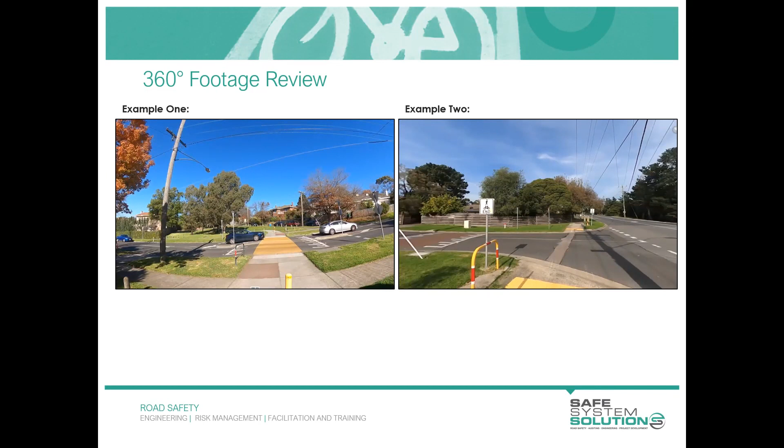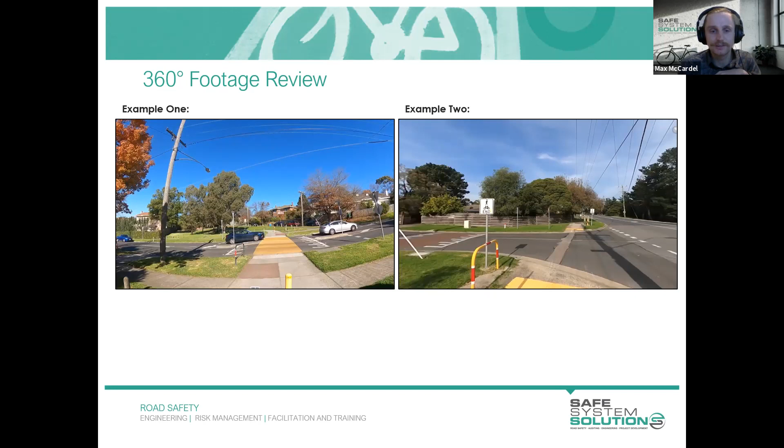Okay, so that's just a quick review of the 360 footage. I also just made a note in the previous module regarding this little slow point treatment that I mentioned is in Perth, and I said I'd follow that up with a photo of what that looks like in busier times. Apologies for the resolution of the photo - I thought I had a better snap of this, but you can see the pedestrians there crossing in that particular zone to access the train station.

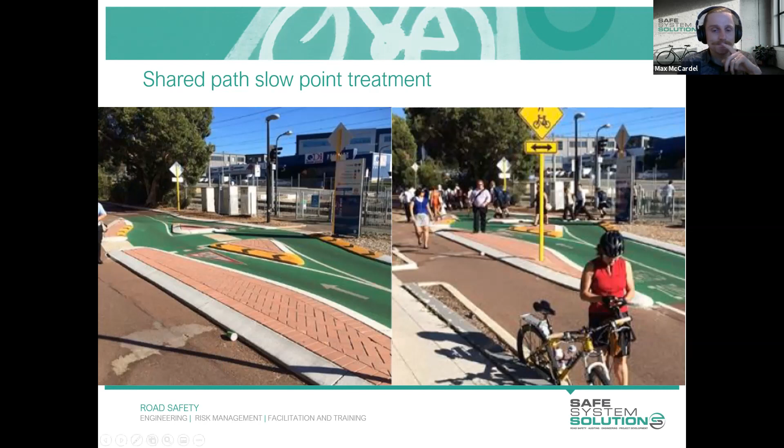It's City West train station for those that are familiar with Perth. And because there's such a congregation of people there, they decided to put this treatment in to slow cyclists down. However, the suggestion from Tuesday to raise that pedestrian crossing point instead, I'm still all for that. I think that would have been a much better solution, but this is just an example of what could be implemented.

Max, the questions come in around road rules. Don't the road rules require cars to give way, like in example 2?

Yes, so my understanding is that a vehicle turning into the minor leg has to give way to all pedestrians or cyclists crossing that facility, so those turning into the minor leg. However, if you're leaving the minor leg and going into the major road, you're given the priority.

And that's my understanding, Ken, is that true? I probably should have checked in with you first. Yeah, that's my understanding as well. So it's a bit of confusion in the road rules, where on one side of the carriageway you get priority, but on the other side the vehicles traveling get the priority. There's not a clear indication of what the road rules there are really stating, and I think generally both motor vehicles and the general population wouldn't even understand that road rule either. So to me, it really communicates that in that example, you as the cyclist are forced to slow down and give way to both streams of traffic, entering and exiting general traffic.

Good question though. Today's session agenda is all about on-road cycling facilities, as I mentioned at the start. So things we'll be looking at are protected bicycle lanes, which is considered best practice in this space. We'll look at one-way paths as well as two-way paths, sometimes referred to as bidirectional bike lanes, and we'll look at a range of different separators that can be used to facilitate these protected bicycle lanes, because it's often thought that all you can do is provide those Copenhagen lanes with physical concrete median strips, which are an expensive alternative, but there are other options out there which we'll jump into later.

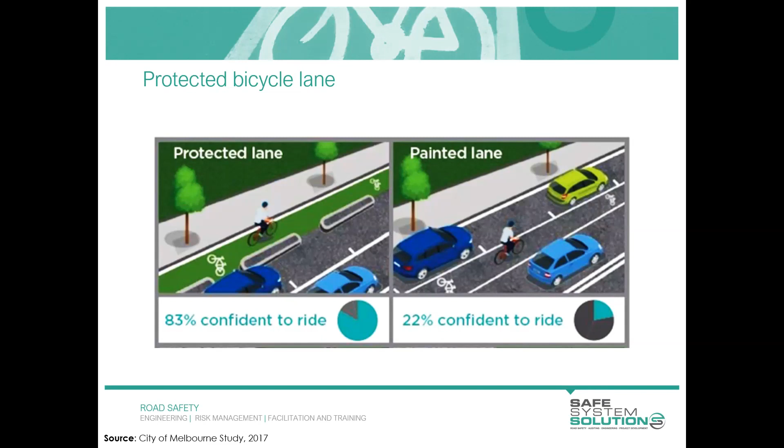Hempcrete - I'm all about the sustainable options, so we will actually touch on that a little bit later in this presentation. I'm very glad that you brought that up, because it will become relevant soon. Any other questions, Emma? Not at this stage, no. Excellent, feel free to keep jotting down any notes. Otherwise I'll keep running through.

So, one-way paths - I've provided this typical cross-section of how this may look. As the name suggests, the cycling traffic travels in one direction on both sides of the carriageway, so you're basically building the infrastructure on both sides of the street or road. You'll see there's a 1 metre safety strip, or median buffer zone, and it's physically raised - not just a painted treatment. There's physical infrastructure to delineate that space.

So what that means is it's not only a visual cue for motorists - this is the cyclist space, this is where I'm supposed to be - but should an errant vehicle fail to see that, or perhaps there's a medical episode and it crosses over that physical obstruction, the curbing there would actually slow a vehicle down. So if there were a collision, it would be at lower speeds. There's also that benefit of physical separation - bringing vehicle speeds down should there be an event where they're crossing over onto the cycle path.

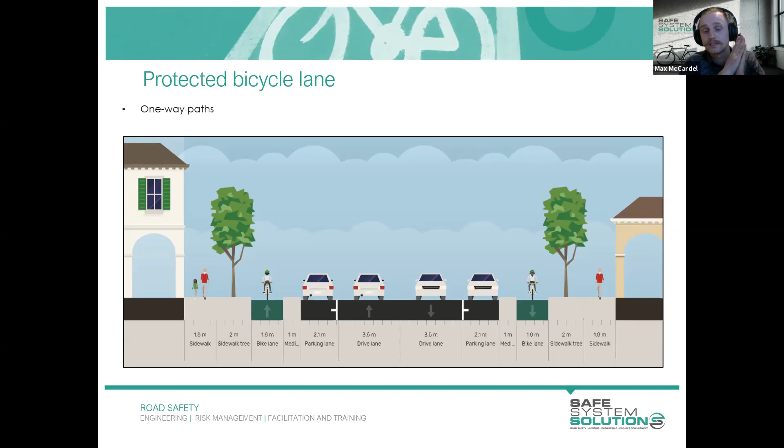So this is how a one-way path typically would look. Sometimes there's parking lanes, other times there's not - it's just adjacent to the traffic through lanes. And here's a photograph of how this may look in the real world. You'll notice in this example these are typically called Copenhagen bike lanes, and they're provided with this fairly wide safety strip.

Any idea why we would need these kind of wide safety strips where there is parking? Let me get my pen out - I know last time there was a little lag between the pen drawing and me speaking, so I'll try to delay it a little. But any idea why there'd be a width of approximately 1.5 metres adjacent to the parking bays for these?

I'm getting a few responses here, Max - people saying doors, prevent dooring, people getting out of cars, car doors. Yeah, car dooring, spot on.

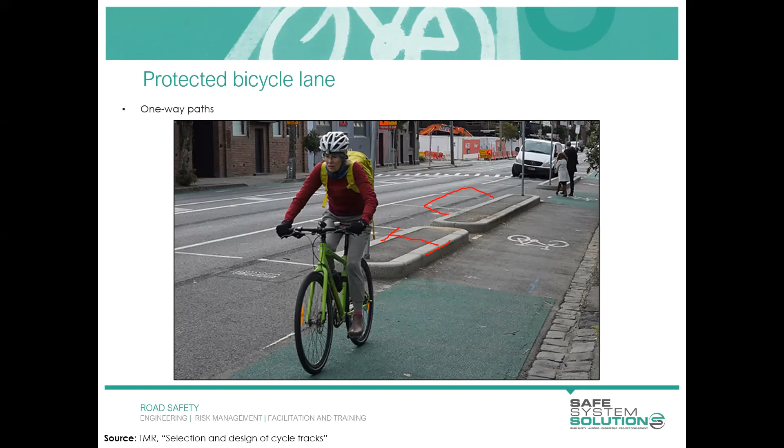So even if passengers open up the car door and fling it to their maximum extent, their ability to hit a cyclist in the cycling lane is greatly reduced because you've got this extra space. It's also really useful for mums and dads getting prams or toddlers out of cars - you've got this separated, elevated space that can facilitate all of that movement without having to enter the bicycle lane. So it's got a two-way kind of benefit.

The other side of the coin is it does provide an additional tripping hazard for people who are crossing the road along the journey. And there's also something else to consider, that being drainage.

If you provided these separation strips in a continuous fashion, then all the water would kind of pool at these curbs, which would then have to be, either you'd have to install some new drainage lines to take that into account, or the more common way to kind of account for these things is just providing little gaps, as you can see in this picture here, and that just lets the water funnel through and go into the existing drainage lines.

So that's what a one-way path would typically look like.

For bidirectional paths, you'll see here the difference being that all the cycling traffic is located on one side of the carriageway. This would be most appropriate where you have all of the exciting things, or the things that would make you as a cyclist stop and get off your bike, located on one side of the road. So if your train station is on that side of the road, and your library, all the cafes, and on this side of the road perhaps is an esplanade or a beachfront or something like that. Perhaps this is designated, the left-hand side of the screen, as the priority side to cater for.

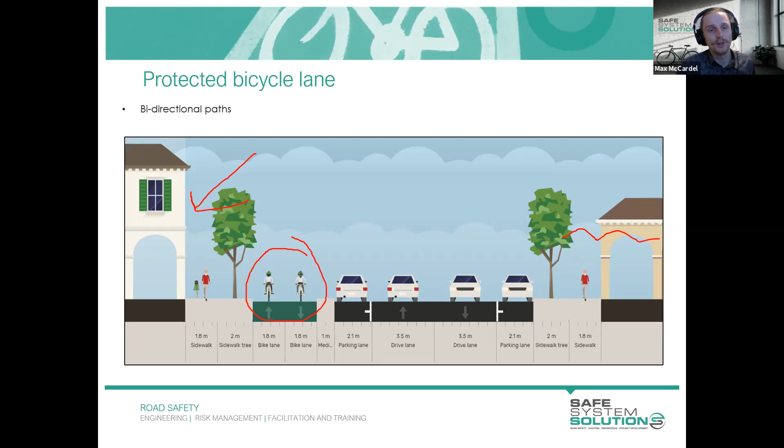This is really where a bidirectional lane would be most relevant. So they're not quite as common as the one-way path shown before. However, they do have their uses, and there's a few little drawbacks that I will talk about with providing these bidirectional paths. I'm not trying to discount them, because they do provide still the level of separation from general traffic, which is fantastic, but there are a few little extra considerations you need to take into account if you were looking at implementing bidirectional paths.

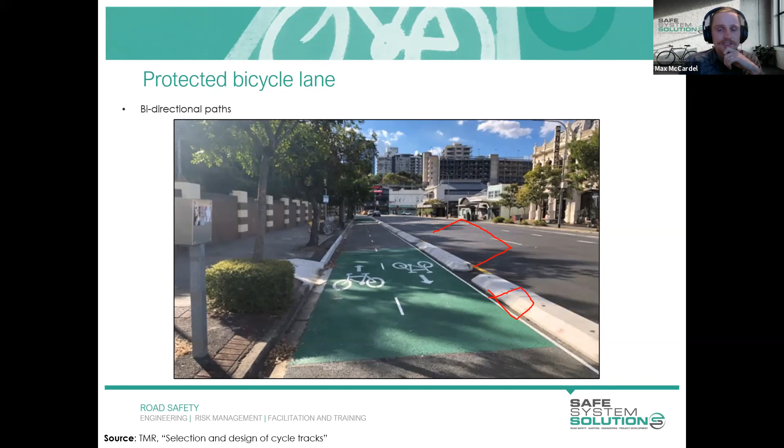So as I touched on earlier, I just wanted to run through a few of the considerations as part of both providing a single lane or one-way bicycle lane versus a bidirectional two-way bicycle lane.

So both examples provide physical separation between vehicle traffic and cyclists. Both of those get a tick. That's awesome—you're getting all your general traffic away from your cyclists, and they're physically protected by some type of separation strip. So that's fantastic.

The other characteristic is physical separation between cyclists traveling in opposing directions. So a cyclist going northbound and a cyclist traveling southbound in a single lane, one-way operation are on other sides of the carriageway, so they're not going to hit each other. In a bi-directional facility, you've got them right next to each other—in other words, a cyclist can hit another cyclist because there's a potential conflict there. That could be particularly relevant if there's any curves or narrow points along the alignment, and considering things like wind or just the ability to maintain stability as you're cycling uphill, you may have to start wobbling. That risk of actually colliding head-on with another cyclist, although it may be at low speeds, is still something to consider if you're providing a bi-directional facility.

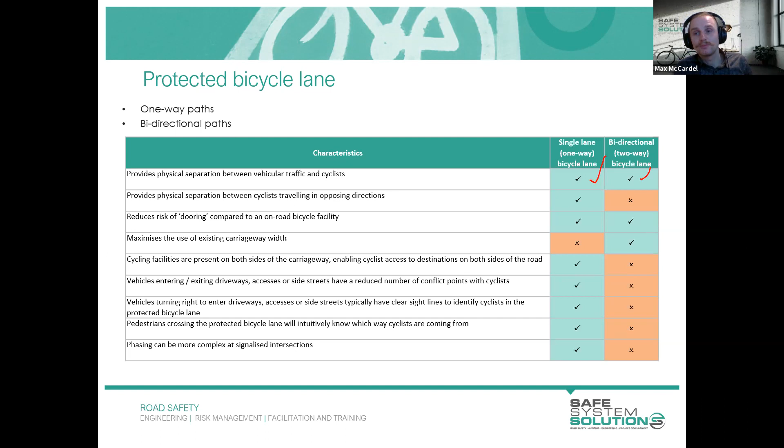Phasing can also be a little bit more complex at a signalised intersection where you've got a bi-directional facility. Not impossible, just a little bit more complex. You may have to add an additional phase or green time for crossing where it's all on one side.

Here's an example of what I was talking about, where a vehicle is crossing over the bi-directional facility. This has actually been flipped because it's from an American reference. I've included the source at the bottom, which is included in your resources if you wanted to look yourself. Intuitively, the driver is looking at oncoming traffic and cycling traffic coming from that direction as well. It's not as immediate in our response to look both ways when crossing over a bike path, and that would be incredibly relevant in bi-directional facilities.

So if you've got lots of these little crossover points, driveways, or accesses, you really need to be considering how you're going to communicate to drivers that there is cycling traffic in both directions operating in this space. Because intuitively, motorists are typically looking in just one direction.

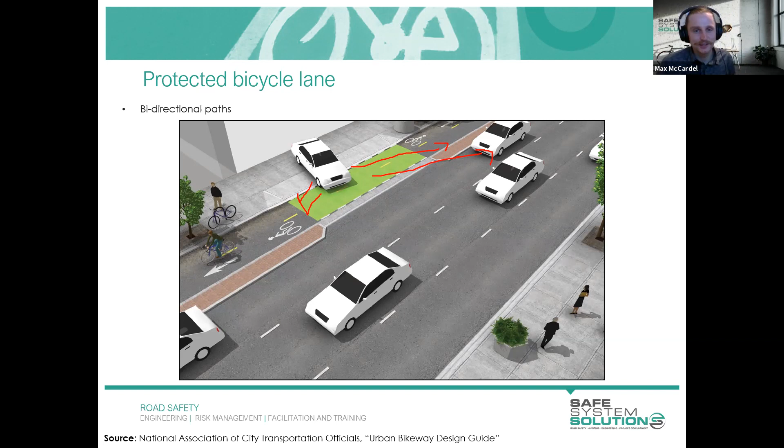In a similar fashion, this has also been adapted from Transport for London's London Cycling Design Standards, so feel free to have a look through that if you want to see the original—it's obviously been doctored for this presentation. If this vehicle here is turning right, you can see their ability to actually sight these oncoming cyclists in the bidirectional lane is fairly limited.

They would have to look right across their right-hand shoulder to spot cyclists traveling, who could very well be doing 20, 25, 30 kilometres an hour, similar to what the car is traveling at. So this vehicle may just be focusing on getting a break in the traffic and the cycling traffic, not really paying attention to any of the other cycling traffic heading in their same direction. So there's another risk there.

That collision can occur because we've just introduced this extra conflict point where the sight lines are not fantastic. I'll open it up to the group if anyone can think of one way we could potentially manage this conflict point in this actual example.

Sure, I've just got some other comments too coming in, Max. So bi-directional can be useful on the one-way CBD streets in Hobart and Launceston.

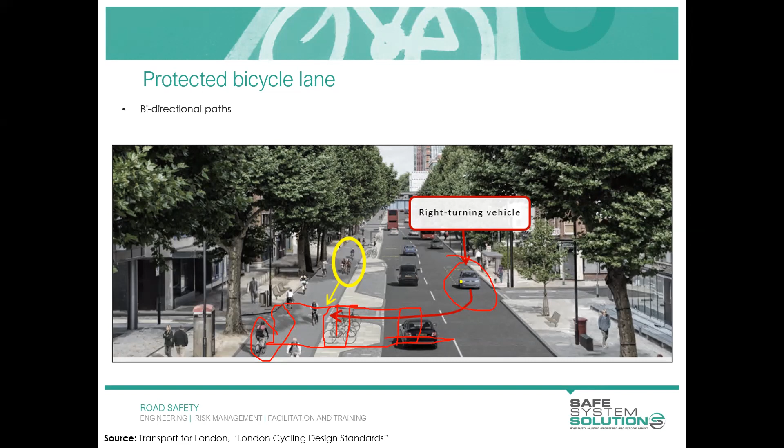Another example: provide enough width for the turning vehicle to have full refuge, so that the vehicle comes to a stop to fully give way. Well, that's just taken the words straight out of my mouth. Can we give that person a prize, Emma? Absolutely, Sarah, that's excellent. That's an ideal situation where you've got the carriageway width available, and if that's justifiable and you're able to do that, it's certainly a good way to manage that conflict.

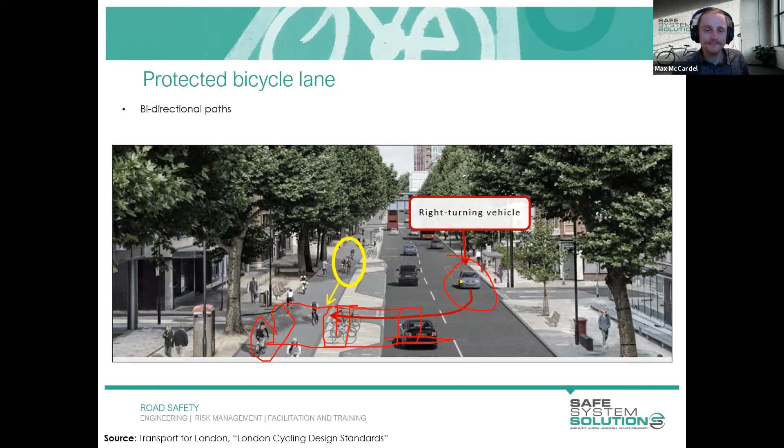I'm going to hop into now the separators, because as I mentioned, when we typically talk about protected bicycle lanes, this is typically what's in people's minds: either a precast solution of a concrete strip with some type of infill, be it asphalt or things like that. However, it's not the only product on the market, and there are other things out there that you can use to provide a physical separation between the cycle lane and general traffic.

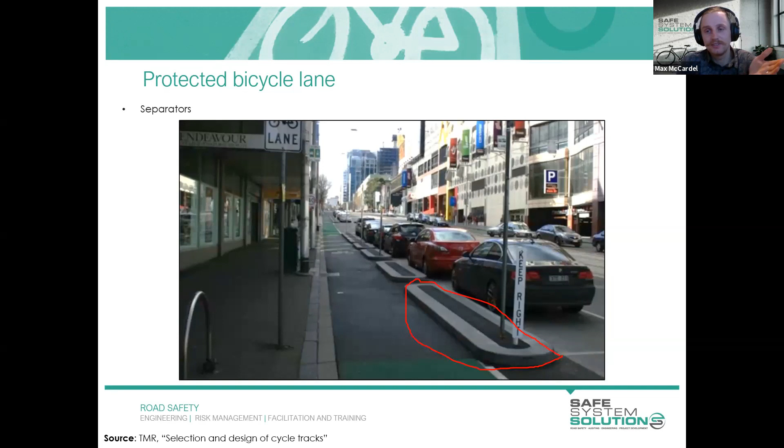We'll hop through a couple of different examples, but while I'm discussing these precast solutions, or even if constructed in situ, a few things to think about are how you actually manage the barrier curb profile. It's generally not preferred to do a vertical barrier curb on the bicycle lane side, because you want it to be a little forgiving if a cyclist happens to shake a little and go over towards the curb. If a cyclist were to strike a barrier curb like that with a straight vertical face, that's a hazard in itself, and would likely result in the cyclist coming off their bike.

On the other side of the spectrum, if you provide the barrier curb for the parking lane, I think that's a good alternative, and we'll come to that reason in a second. In this second image, you can see we've got the semi-mountable option on the bicycle lane, which does get a tick because it's a little more forgiving. If a cyclist were to ride onto that curb, they'll likely be able to correct their movement before falling off their bicycle.

On the other side of things, if you were to provide that on the parking lane side, what can actually happen is the parked vehicle can prop up onto this infill section, or go further across and just park straight onto the bicycle lane. You may think that's a joke, that people wouldn't dare do that, but we recently completed a road safety audit, and we have photos of people doing exactly that.

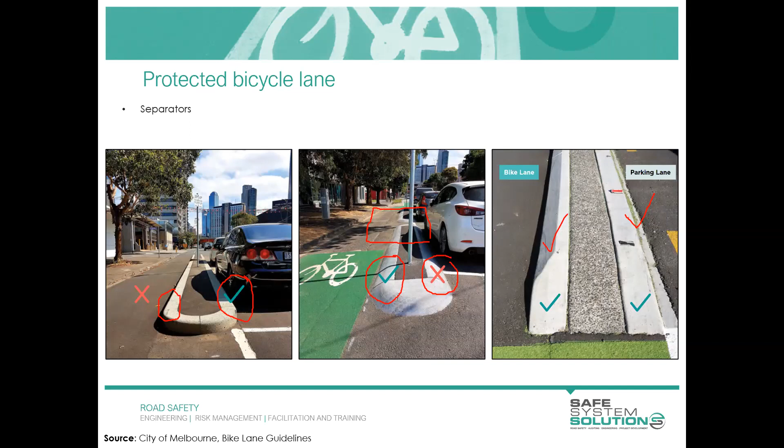So yeah, and no surprise that motorists would park on a mountable curb area. Footpaths are also parking spots here in Hobart. Are there risks? That's exactly right. So yes, that's why it's best to not provide that provision, and hopefully reduce that risk altogether.

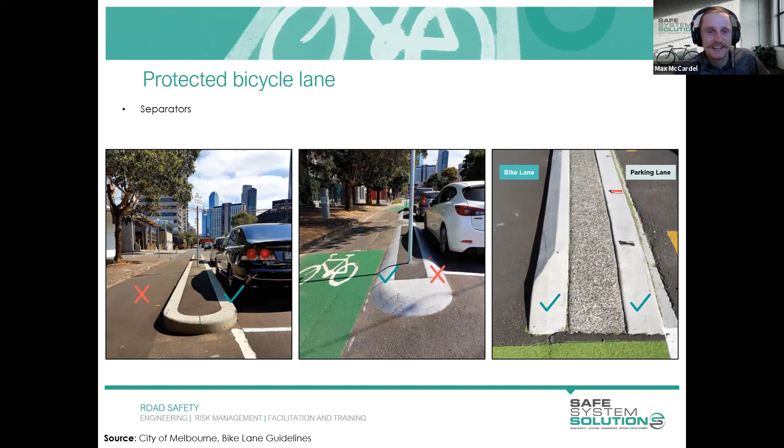Another thing to consider if you're providing those wider safety strips is whether you've got any disability parking bays, ensuring that all DDA requirements are met. It's disappointing to see, but if you're not including things like curb ramps or a way for people using these disability bays to actually access the adjacent footpath, and also providing some kind of communication that this is the crossing point where we want people to access the footpath from the disabled parking bays.

All of this is incredibly relevant if you are doing detailed design, just making sure that you're not building these protected safety strips all the way through, as shown in my red drawing there. Otherwise, you've just blocked off people from accessing the footpath, which is not a good outcome.

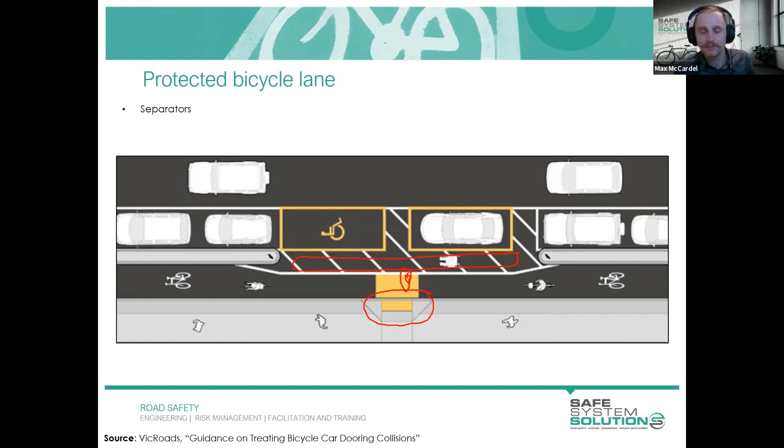Another really good option here would have just been to raise up this pedestrian crossing point, because that also signals to cyclists that this is a pedestrian crossing point - I need to slow down, I need to give way to pedestrians crossing here. What you've got there is just a poor outcome for pedestrians. So something else to consider where you're providing protected bicycle lanes: if you are doing any crossing points, make sure there is access for pedestrians.

Okay, so I'll hop into some other types of separators. Here's one that was looked at before, and this is most appropriate where we are looking at providing bicycle lanes next to through traffic lanes, not next to a parking lane. So if you don't have to worry about a door opening, you can minimize the width of the product you're using. This is a bolt down precast concrete island, used in segments.

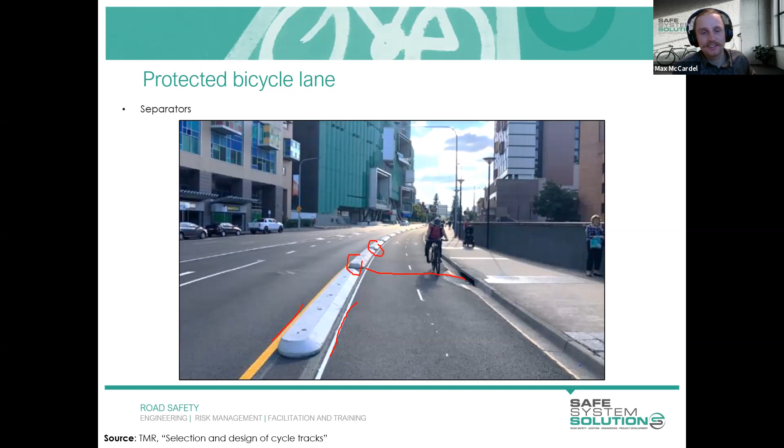Once again, you can see the gaps that have been implemented to facilitate drainage, so the water can run out into the pit and you don't have to design a completely new drainage line as part of doing these bolt down works. A few things to remember: providing those gaps to ensure adequate drainage, and also making sure all the sight lines are there so cyclists can see exactly where the physical separation strip is in place. You'll also note that has got the semi-mountable curb there as well.

Any questions so far, Emma? I've just got a few comments actually. Well, what if you are a driver with a disability, as in the previous slide? There's tram stops in there as well. Perhaps - oh, this slide, was it? Yeah, I think, or then maybe the one before. Yes, probably, perhaps, yeah, that one.

So this is predominantly for the bus stop - that's the bus stop kind of there. I don't think there's any parking along this section, it seems to be all off-road over here. I can follow that one up after this session though, just to confirm the extent of that question. Yeah, no problem.

Coloured would be more effective. Yeah, coloured crossing seems to be becoming more and more prevalent, whether that's a red with white zebras, or I've seen pink out there as well, and yellow. But yes, coloured pavement seems to be more and more used.

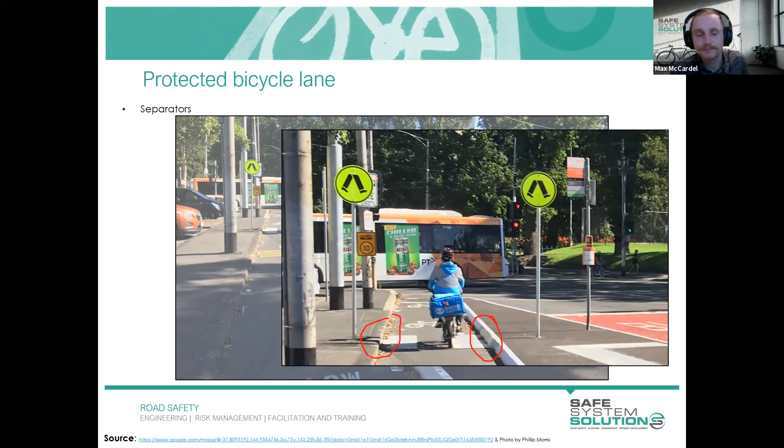A raised crossing there would in turn require added infrastructure - stormwater infrastructure maybe? Okay, yeah, stormwater, sorry. Stormwater infrastructure, yep, that's true. So if you are raising a particular crossing point, you do need to look at whether you need to provide additional pits and pipes to make sure that you're not introducing any extra ponding areas - something else that needs to be considered during the detailed design of these things.

There's another comment that stormwater grates would have to be bike safe. Yes, that's right. So you want to make sure that the tyres for cyclists are not able to fit in your stormwater grate. Otherwise, you've just introduced a new hazard as well.

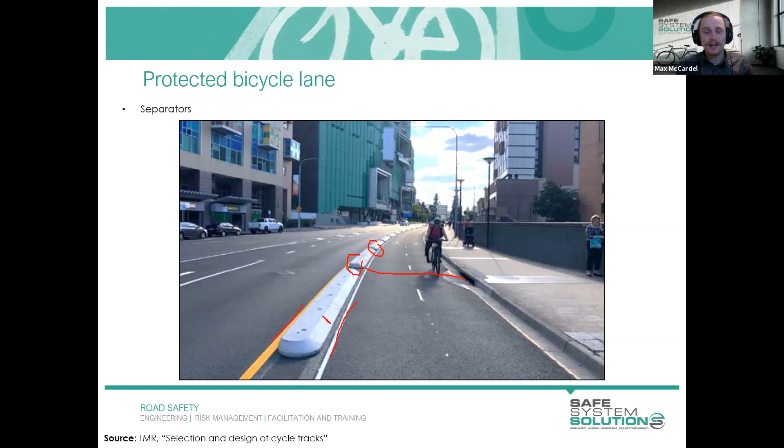Because it does provide the physical separation, so that one gets a tick, and it clearly delineates where the cycle space is versus where your traffic stream should go, so that also gets a tick. But it's something that doesn't gel quite too well with me. Someone's commented that the height of the corners may be a danger, it's hazardous, these planter boxes, perhaps it isn't mounted enough.

Pedal strike as well, no space for people exiting cars. Basic things like weeding and watering, practical things. That was actually where I was coming from, the practical nature of these things, and also the fact that plants can become overgrown very quickly, and then you've got leaf litter and things like that spreading into the bicycle lane. Although it may look attractive on day one, does it still look like that 12 months down the track? Has it been vandalized, or has it just become really bushy, not quite as appealing, and almost a hazard in itself if you've got lots of vegetation spreading into your bicycle path?

So something to consider. And also, if you do require pruning or anything like that, does that mean the bicycle lane gets shut off and cyclists have to now travel in the traffic lane? Because I don't think they'd be closing the traffic lane to do that kind of maintenance work, they'd be closing the bicycle lane as the first point of contact. So I'm not against this kind of treatment, and I think it's a nice way to improve the streetscape amenity, but I think you just got to be mindful of which products you use.

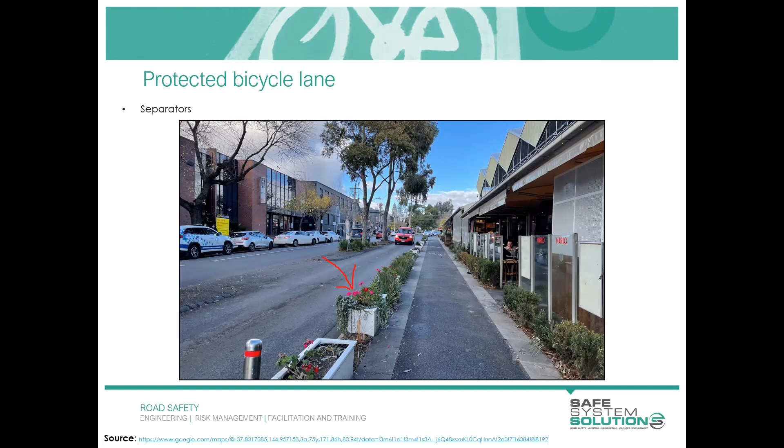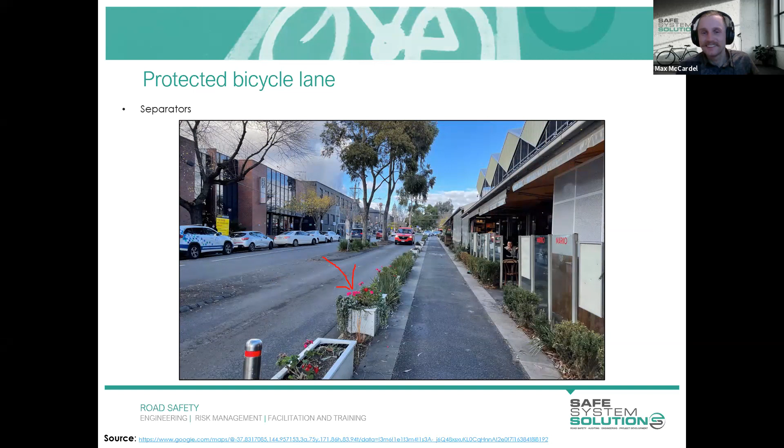A few people are saying it would be a bit chunky, or tricky if you fell into it, with sharp edges and things like that, and it's hazardous is the general consensus. Someone said this would be considered a low-level fence, a pedal hazard that you mentioned yesterday. I completely agree, that's right. And you could certainly pick that up as a hazard if you're doing a road safety audit, or as you're going through the design, you could note that as a hazard. There's no continuous rail either in that principle. No, that's exactly right. Yes, perhaps some warnings or something like that, someone else has said. This sounds hazardous, we're all on the same page there.

These little guys do have a specific product name, so they are a proprietary product. I'm not trying to sell them or anything like that, but they are recycled plastic, which is a big tick in my book. And yes, they're just bolted down.

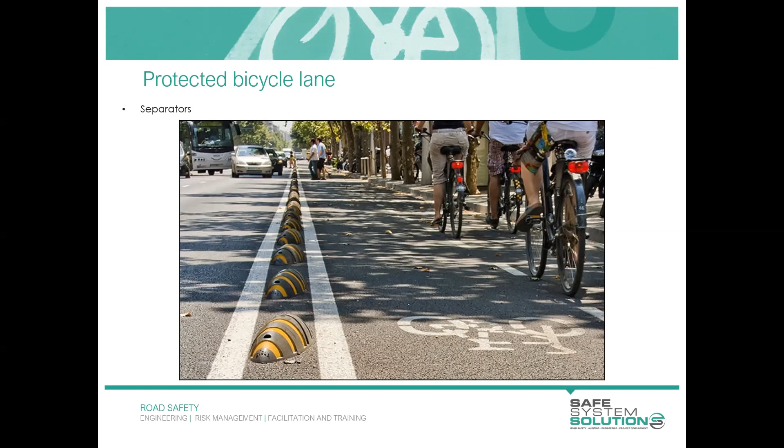I'm going to open this up to the floor as well. If anyone has any idea what this product would be called, don't just start guessing anything you want, the title does relate to exactly what it looks like, so that's the only clue I'll give, but I'm welcoming any hilarious answers. That is cute, we've got a pangolin, bumblebee. Oh, pangolin, that's a good one. A bumblebee, nice. Armadillo. Road slugs. These are great. Bees. No wonder the bees are dying. Lots of bees, lots of bumblebee, rumblebugs. Yeah, ladybugs. Ladybug. Well, maybe we'll get in touch with the company that produces these, because we've got some new alternative names for them, Emma. This is good stuff.

The name of them is, in fact, the armadillo. So whoever gets the armadillo, please give them a prize, Emma. I think I'll give a prize to the pangolin as well, because I'm pretty sure that's a very similar animal. They look fairly similar, so I just also like that word.

The armadillos are used pretty extensively in the US and also Spain. Obviously, you don't have that significant physical impedance anymore, as opposed to what was first shown with the protected bicycle lanes. However, it does still delineate the space between the bicycle path and the general traffic lanes, so it still does use that.

There is a trial that has been installed in Fremantle in Western Australia. It's a couple of years old now, but we do have precedents to install these in Australia. I've actually never cycled adjacent these things, but I think they're pretty cute, and I like the idea that they're recycled, and I think that's a genuine option. Once again, this would be appropriate where it's not next to the parking lane, so there's no swinging open doors, but if you're next to the traffic lane, this is a potential solution there for you.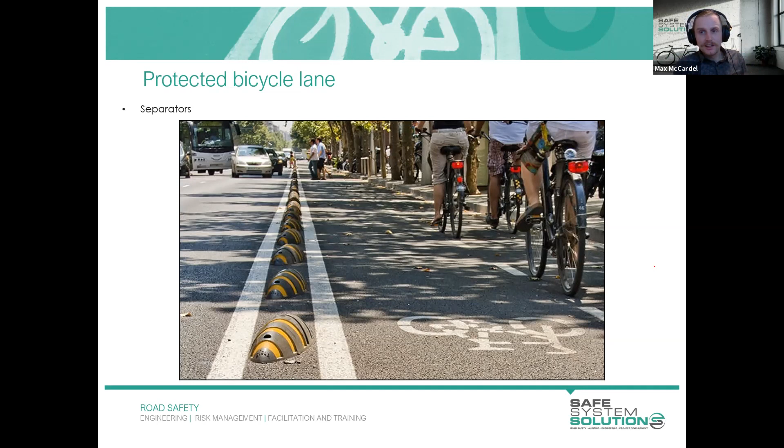And recently we worked on a job, which I might share at the end of this session, for the City of Greater Geelong, where they are proposing some bi-directional and single-way lanes. They have proposed 3 different types of protected lane treatments, one being the precast section, one being bollards, which I'll hop into next, and the third being this armadillo type as well.

So I can share, they've gone out to tender with the drawings for the plans. For those that are interested in how all these things actually look on plans, on actual designs, I can share that as a link, and you can download that design and have a look exactly how these things look on paper. It's a useful resource just in case you are designing something in the future and you're not exactly sure the best way to demonstrate how this facility would look. It gives you some type of precedence. So while it's available and openly on the tender website, if you've got the inclination, feel free to download it.

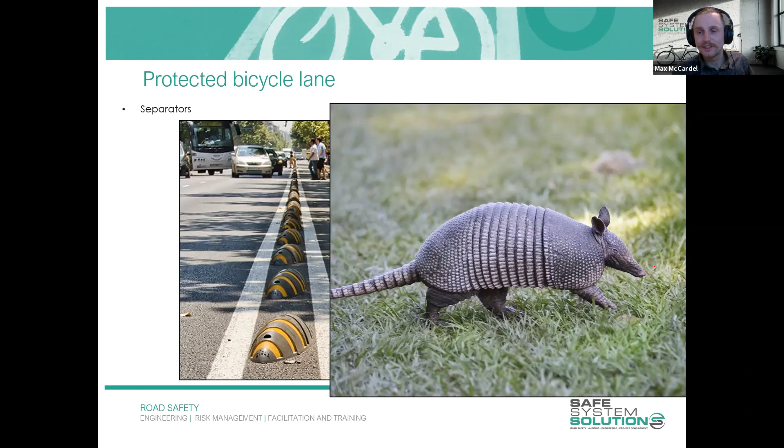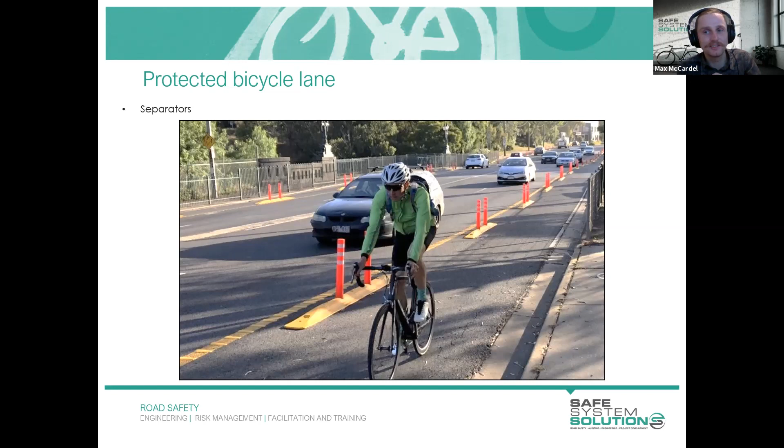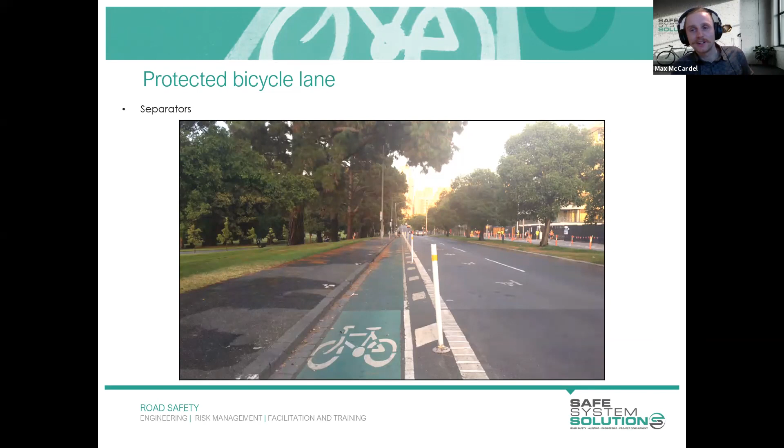Okay, so on-road bicycle lanes. So that's it for protected bicycle lanes.

We've got some other questions just come in before we start this. It's about all the other infrastructure, the armadillos and things like that look like a tripping hazard for pedestrians. Do you think we could use safety bars here? It might work well if well maintained, but as we all know, things bolted to the road are only as good as how well they are maintained. If not, they become loose and become a hazard.

Also, someone said, do people try to park in bike lanes? Yes, yeah, they do.

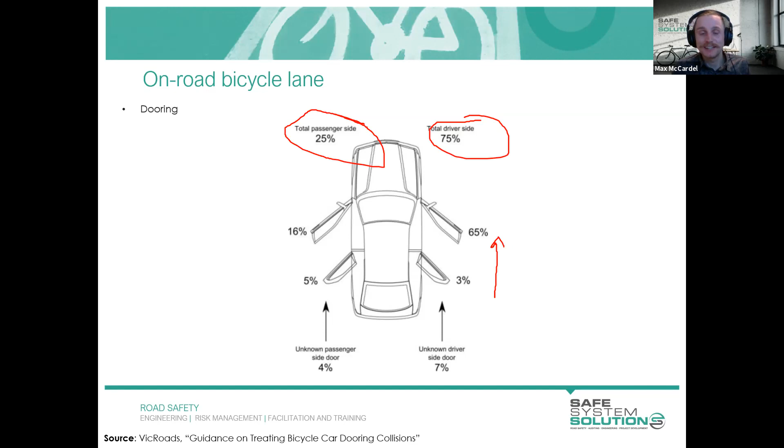The Vic Roads document, or the Department of Transport as they're called now, has their own technical paper called Guidance on Treating Bicycle Car Dooring Collisions, which I've just written down there in the source. It's got this fairly useful little matrix to suggest what may be required in different situations.

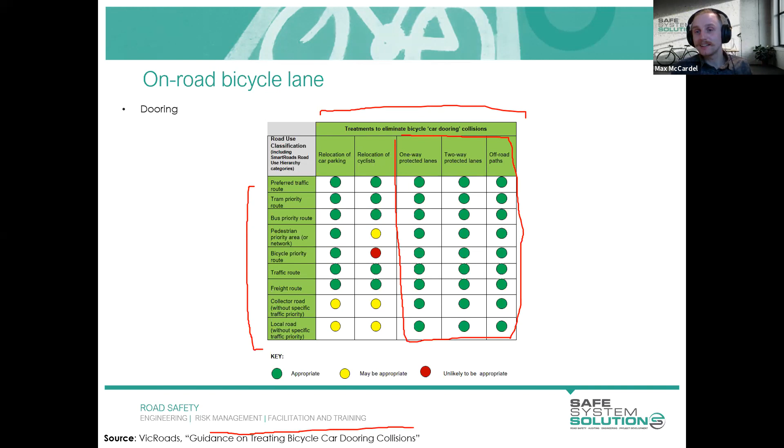Down this side you've got different road uses, if it's a collector road or a local street or something like that, and along here is the typical treatments that may be appropriate, where green is saying it's appropriate. According to this table, one-way protected lanes, two-way protected lanes, and off-road paths are always appropriate, which is really cool, really good to see. They're kind of encouraging more and more of this infrastructure to be out there - they're never saying don't consider that as an option.

The only time where it's unlikely to be appropriate is if you've identified a bicycle priority route, relocating the cyclists should not be one of the options, which is pretty intuitive. If this is exactly where we want cyclists to be, then banning them from that particular route is not an option.

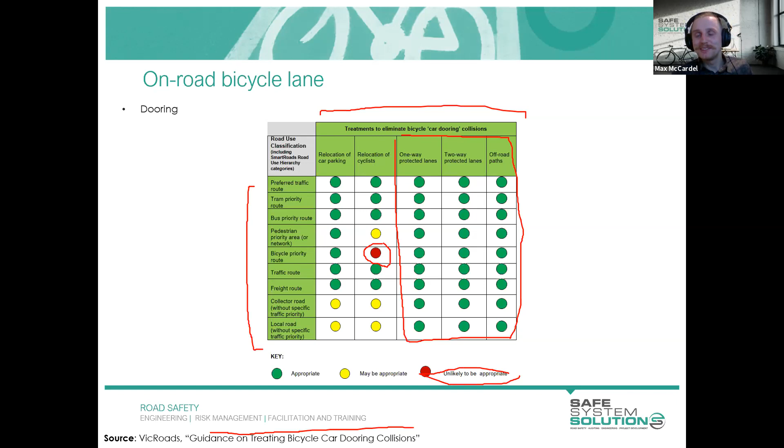So it's just a useful little table if you're considering what can be done in this space. I've got quite a few more slides to get through, so I might have to jump through these with a little bit more rigor.

As a general overview of the evaluation, riders took time to adapt, but there was a lower proportion of cyclists riding within 800 mil of the parked car, within that dooring zone. They do appear to be getting shifted closer to it. It was actually a reduction from 13 to 20% prior to installation, to less than 5% after. So there is a reduction seen.

It's certainly not the answer to these situations. It's just an example I thought I'd share where they tried this as a trial, and they seem pretty happy with how things are working, but I certainly wouldn't consider this a best practice treatment in this space, because even if you were cycling in that little green strip, it seems to still be within that dooring zone. So you haven't eliminated the problem, you've just put a little bit of paint down.

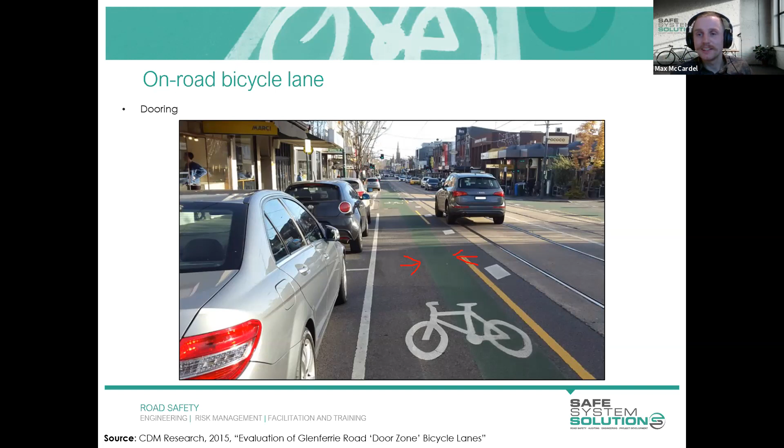Other things you could look at in this space is using double chevron. This kind of pavement marking is referred to as chevron, and using it as double protects you a little bit from the traffic lane as well as the parked lane, providing that buffer zone on both sides.

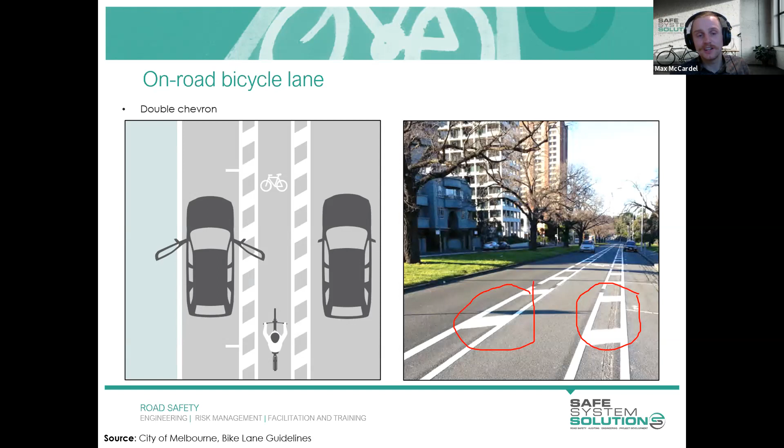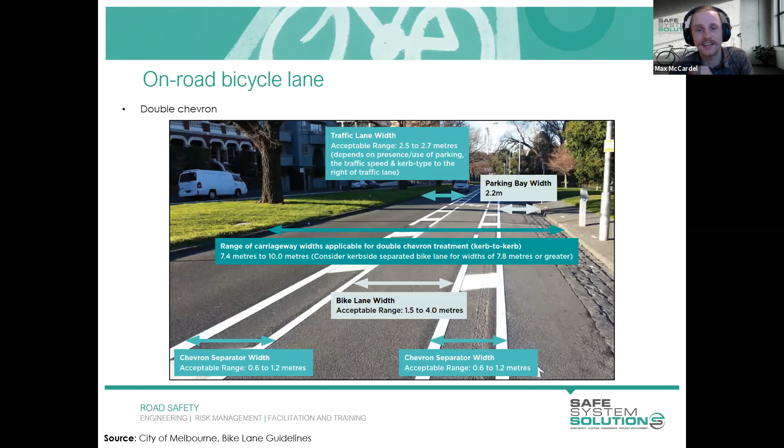How this may actually look, the typical separation width is between 600 mil and 1.2 meters. As I mentioned before, that 1.2 meters is taken as the extent of an opening door, so if you can achieve that, you're generally providing a safer cycling route. This is a good way to communicate to both general traffic and cyclists that this is their space to ride between, with a bit of buffer on either side, giving greater safety compared to what was previously shown.

A more common way, due to restricted widths in existing carriageways, is putting the chevron either on the parking lane side or on the traffic lane side. The reason you'd put it on the parking lane side is if you have a high turnover of traffic, in other words if doors are regularly opening and closing, such as a strip shopping centre or somewhere with 2-hour park limits. There the risk is more focused on the opening of the door, because that's probably occurring more often than in other environments, and so that's where the buffer has been installed.

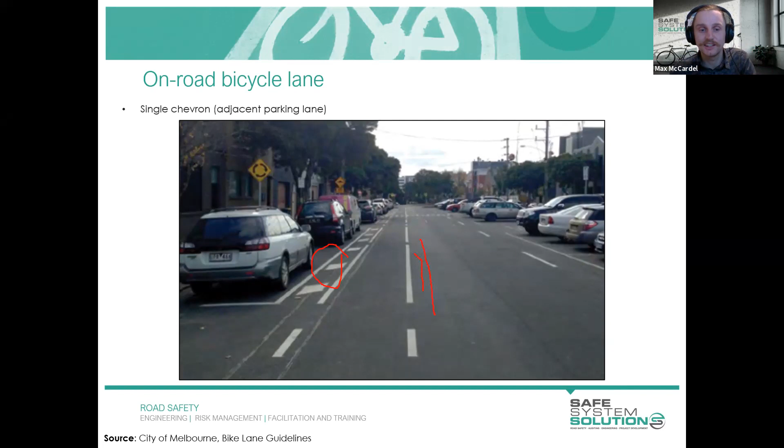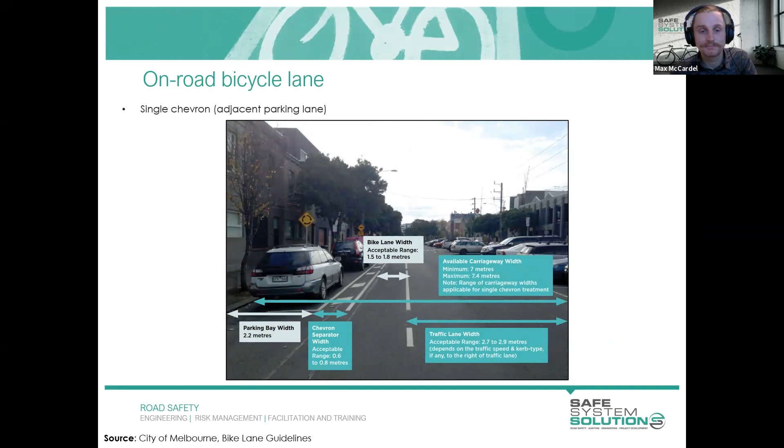In an ideal world, you'd have the buffer on both sides or a protected facility, but given that we don't always operate in an ideal world, you could look at applying the single chevron adjacent to the parking lane. There are some figures there as well, similar to what was shown on the previous slide, using the 600 mil chevron separator. And here's the other option where you've actually got the chevron on the through traffic lane.

This would be more appropriate where you've got long-term parking, perhaps in a residential street where the predominant parking is people accessing their houses. They're there all day, and door openings would not be as frequent as in the other example. So there's not an exact science to say this many door openings requires this, and that many means you can put something like this.

It does require a little bit of professional judgment, discussing the risks of both options. Personally, as a cyclist, even if I knew this was a residential zone and doors aren't opening all the time, I'm still a lot more nervous about the parked traffic than someone driving in the traffic lane, because a driver can generally sight the cyclist as long as there's not massive curves or obstructions. But generally someone driving in the traffic lane can see a cyclist, whereas someone parked in their car may just swing open their door without even thinking about it.

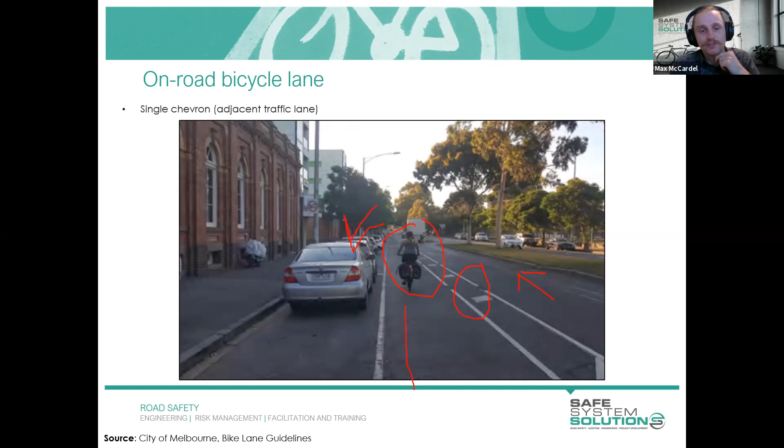So I tend to promote the chevron on the parking lane side instead. But there's answers for both, really.

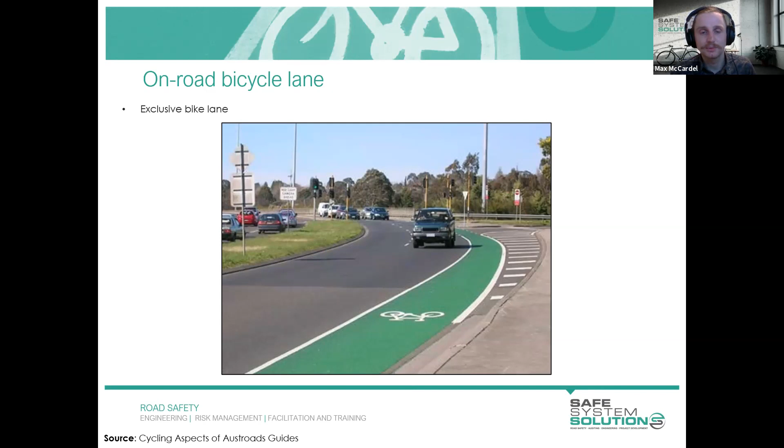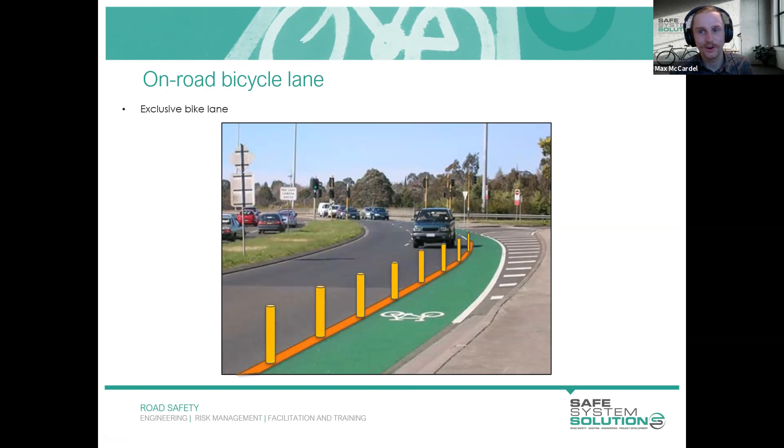The exclusive bike lane is installed fairly commonly on roads that are fairly high speed as well, which is not really a good outcome. I'm curious as to why this is promoted and encouraged as part of our guidance. Why could we not put some kind of separation strip in there that protects cyclists a little bit better? If you're willing to say that is exclusively a cycling space, we should be trying to protect cyclists as best we can, understanding that they're incredibly vulnerable, particularly on high speed roads. Ideally, you'd get them off the road altogether.

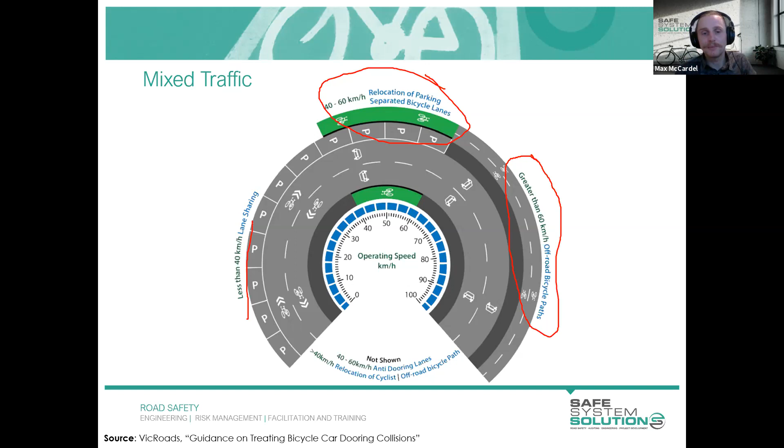It's just saying that where the speeds are less than 40 kilometers per hour, lane sharing may be appropriate. If it's between 40 and 60 kilometers per hour, then the relocation of parking or separated bicycle lanes. And greater than 60 kilometers per hour, off-road bicycle paths. That's not always the case - I've certainly ridden in higher speed environments where there hasn't been an off-road bicycle path. However, this is a really idealistic way of looking at things, and if we are trying to get best practice, this is what we should be looking at as our fundamental basis - our starting point, referring back to this.

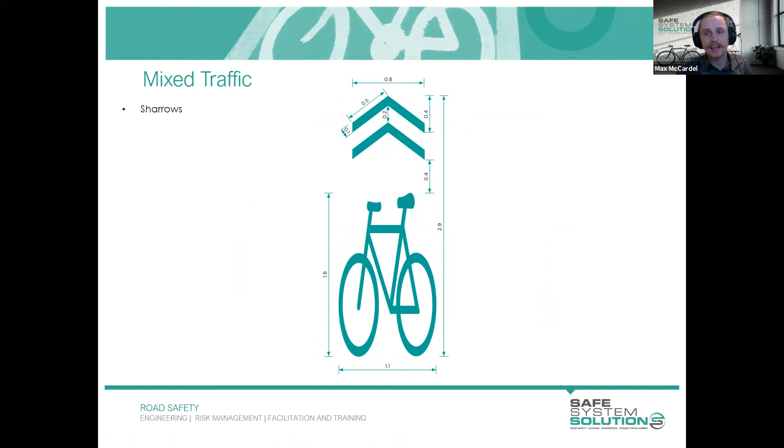So we've got these things called sharrows, for those that are not familiar. What it's actually stating - this is the bike symbol with the chevron arrows - is that cyclists now need to take control, and you're in the traffic lane now. So basically you no longer have your own bicycle facility, go ahead and ride in the traffic lane. That's what that's saying.

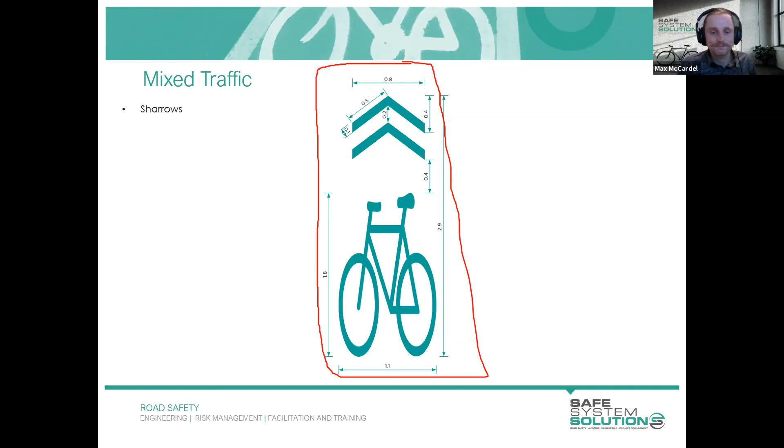It's used very commonly where bicycle lanes just drop off, say at a roundabout or something like that, stating that you no longer have your separate facility - now it's just a free for all, go for it. If the speeds are low enough and there's enough local area traffic management treatments in place, it can be a very reasonable solution. Think local streets and riding around residential areas - typically you may not need to provide something like a protected bicycle lane. This can be facilitated through sharrows and other local area traffic management, just keeping speeds low.

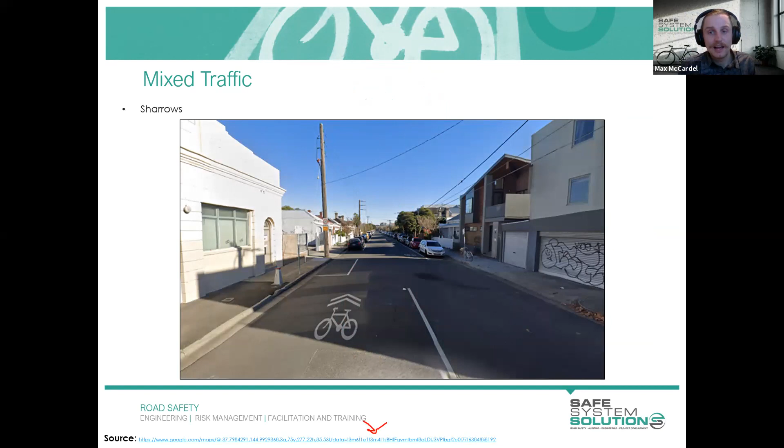So here's an example, and if you wanted to follow the source, I've included that link at the bottom there. Interestingly, this exact example has a speed limit of 30 - there's few examples where you can find that throughout Australia, really.

So it's actually quite a good environment to be cycling through, and you've kind of seen the distance there. There's some speed humps just to reinforce that this is a 30-kilometre speed zone, trying to bring those operating speeds down. Another example I've got here is once again in the 30 zone.

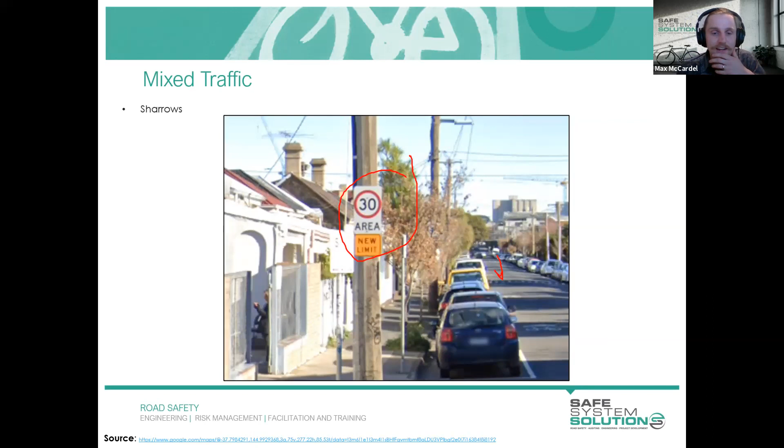This is actually in a rural town, not a central hub, but you've got the sharrows there on the pavement, and cyclists are basically using the traffic lane as a general motor vehicle would. You've got the reminder there, that big old 30, so we're really promoting these lower speeds where you are sharing the lane.

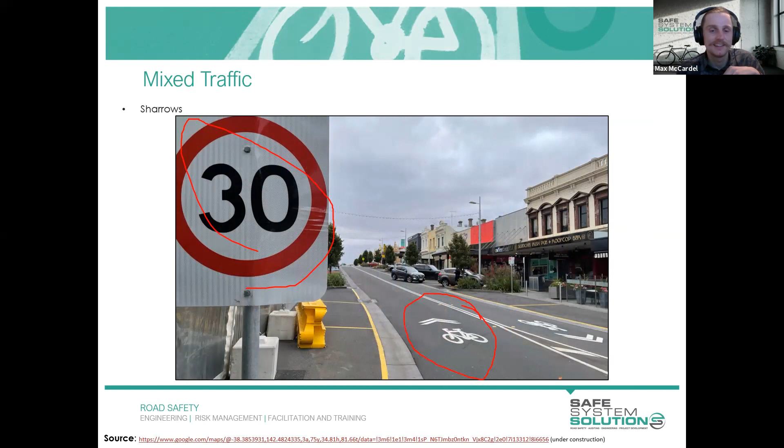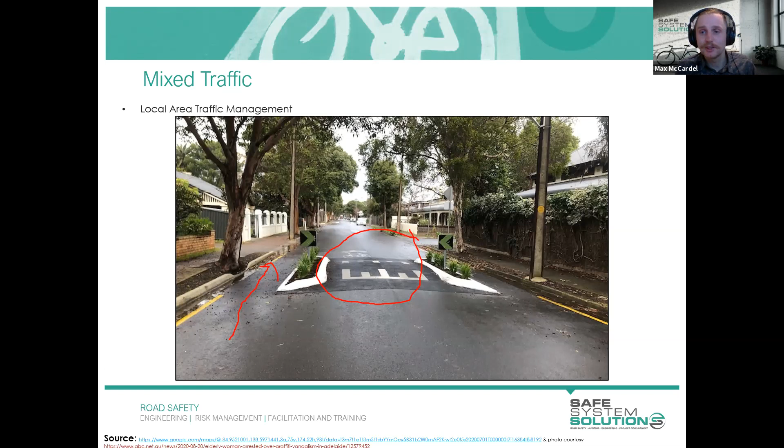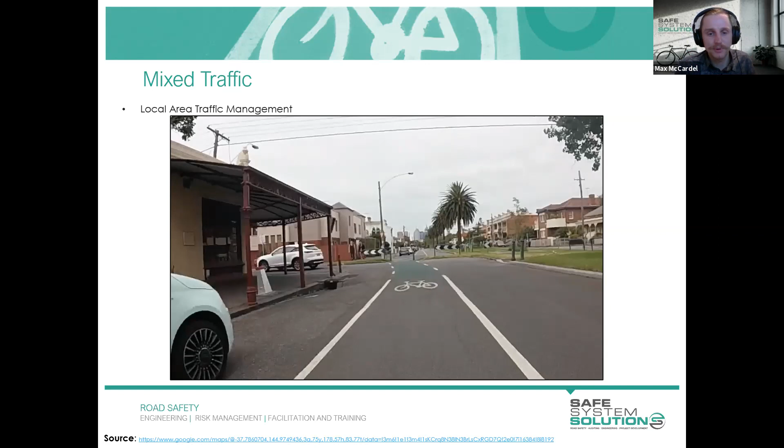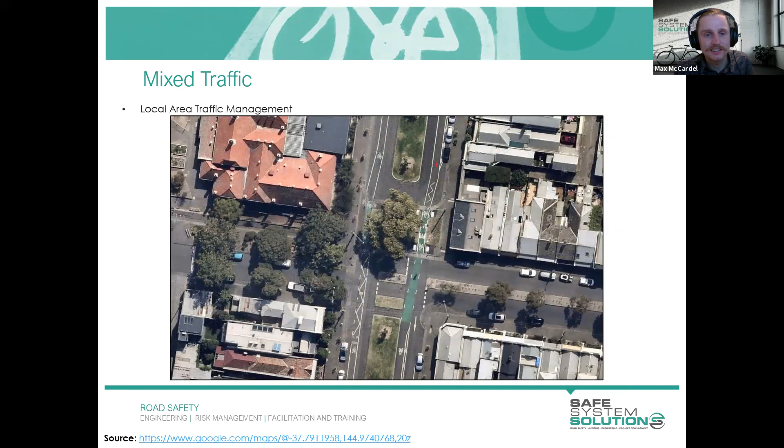So I've got a better example of how this could be facilitated, which is this one here. Not the easiest to see on the snip, but jumping up to the aerial bird's eye view, cyclists can travel straight through here, no problem. Motor vehicles face a full road closure, so they have to turn around and find an arterial road to complete that movement, because this road is just not set up for that type of movement. They just blocked it off to through vehicles and said, if you're cyclists you can go through, we want you, but motor vehicles, we don't want you.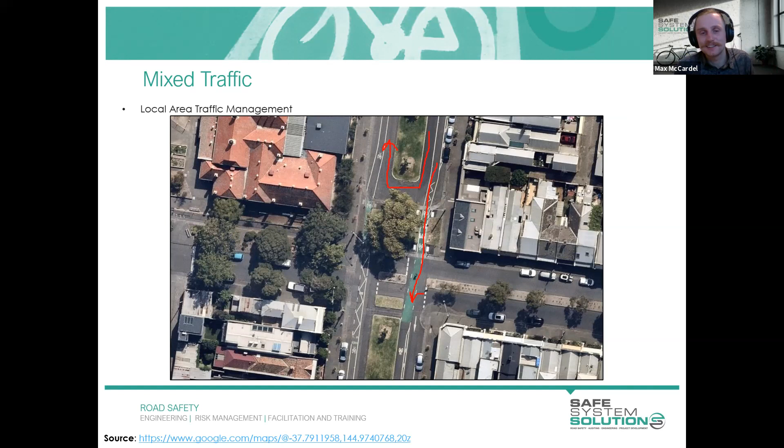So this is a much better example, and what that does is it recreates this network. Instead of being motor centric, it's basically only providing for the residents along this street, instead of enabling rat running and things like that. So it's quite a good example.